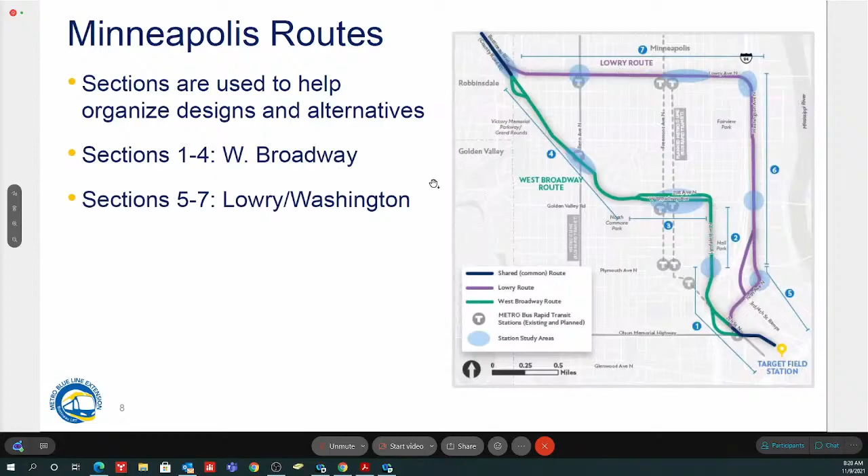Now, sections 5 through 7 are the Lowry Washington routes. Section 5 takes us again from Target Field Station roughly up to that Plymouth Avenue area on Washington. Section 6 is Washington, primarily Washington Avenue from Plymouth up to Lowry. And section 7 is a very long section, from basically Washington Avenue over to the West Broadway Lowry intersection. That's how we've organized it, so you can go in and find this information a little bit better. Next slide, please.

Some of the highlights we'll have in these sections: we've simplified the links here. If everybody remembers, I think it was even in March, we rolled out the links out of the downtown area, shown in the yellow box here. We had kind of the rainbow spaghetti, as we referred to it, with a lot of different options. As we've worked with the project partners, we've dove into these links and how they would fit and connect, and we've narrowed those down. We've taken out some of the link options that were challenging or beyond challenging, probably not feasible, either how we were getting off at Target Field Station, or as we were trying to find a route that navigated through the community. We were finding areas that were very high impact, or the alignments just would not fit very well.

We also have route options along 21st Avenue for West Broadway. That's kind of what I'll call operational opportunities that we can look at and review as we're going through that section 3 area. And then up at West Broadway, or up at the North Memorial area, we'll have some options there for how we get the light rail either off of West Broadway or from Lowry onto County Road 81.

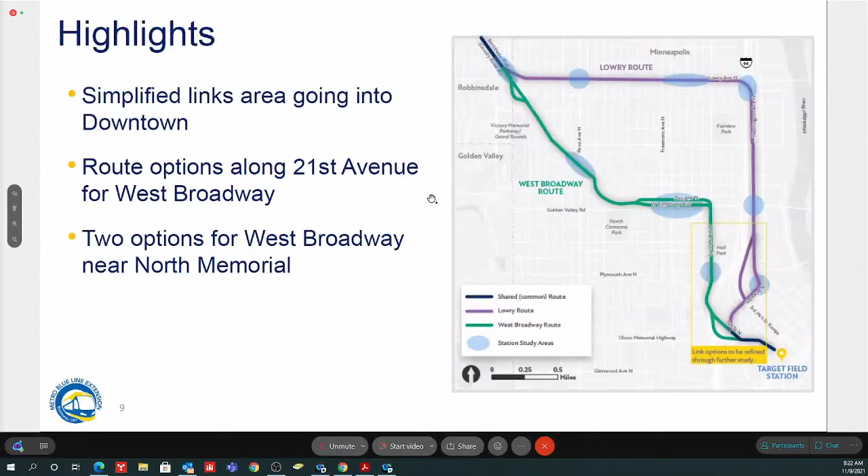Diving even farther down into this map here, this is really going to be key to find those alternatives in each one of these sections. So what we're seeing here is each section has multiple alternatives. We wanted to give some options so folks could see what the challenges were and the opportunities. There's going to be alternatives in there that are very impactful. They seem like they were probably the most intuitive at first as you roll them out, but we see that there was a lot of impacts involved with those. So then we've looked at some alternate options in each one of these areas that try to mitigate and try to limit the impacts that one option may have to the community.

Again, each one of these alternatives are going to show different challenges and opportunities. And the thing with these alternatives, they're just to help inform folks to digest and form an opinion on which route would be the best option. Good morning.

I was wondering if there's a question out there. Just a little background noise.

So each one of these alternatives, we don't need to decide on these now. They're just more informative of how things will work within that route, and they can be carried forward after a route has been selected and into the design phase. So we don't need to spend a lot of time worrying about which alternative needs to move forward. It's more a basis to help inform how a route would work and what the alternatives would be in that route. So in the yellow boxes there are the different alternatives that you'll see.

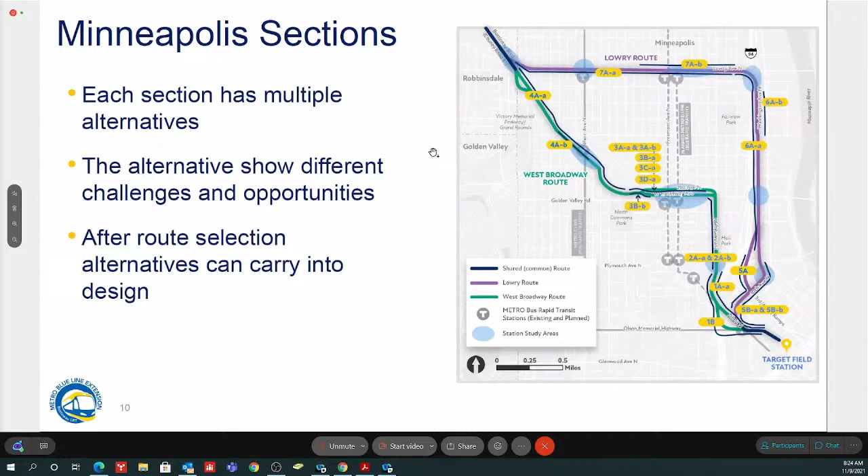Next slide, please. I'll stop and take a break there if there's any questions on how we're laying it out. So kind of a lot of work, but just how we're rolling out.

When we go to the in-person workshops, we'll have 7 different stations for each of these sections that will lay out side by side what all these alternatives are. So it'll be easy to see, okay, I'm in section 7, what are section 7A, section 7B, what are the differences, what are the alternatives, how does it work. So to inform the public, the community, our partners on how things fit in.

Quick question. The alternatives, is there going to be a time set for when these routes will be chosen, so there's no confusion about whether the alternative is going to be used or not? That's the first question. And the second question is, could you talk a little about 63rd Avenue?

63rd, the station up there, is that the question also? Okay, yeah, I can talk about that a little bit. We are focusing on the Minneapolis section here in the rollout, but yeah, I could take a question on that.

So alternatives, let's take that one first. As we move forward with a recommendation for route selection in that March timeframe, that goes through the advisory committees and our process there. We can pull those forward into design. So when we get into design work, our initial environmental work, post-March timeframe, will be when we really take a stab at what those impacts are, what the mitigations are, and what our design challenges are. That's when we'll start narrowing down which alternatives to move forward with. We'll continue to use this format with our advisory committees and our community outreach to help bring that process along.

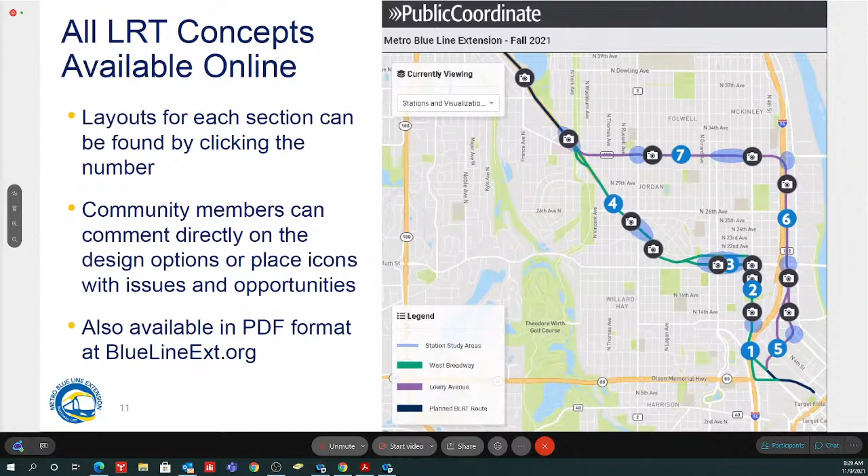Excuse me, I had to sneeze.

So, last one. Again, the whole purpose here is we're trying to seek community feedback. This information is being shown to help folks decide whether a West Broadway or a Lowry route should advance. So this is that open process to get that input. We're showing multiple options in each section on both routes, so folks can get the idea of what the opportunities are and how we can adjust things, avoid things, and move things around with alternatives.

All of this will be detailed and refined as we get into design and start doing our environmental and engineering work, and we'll be working on this over the next few years after a route is selected. Another thing to note as we look into these concepts is that they are just concepts, they help picture how things will fit in. They're based on a very minimal amount of design. They don't show a lot of things like greening, or a lot of the ped bike connections that will be very important.

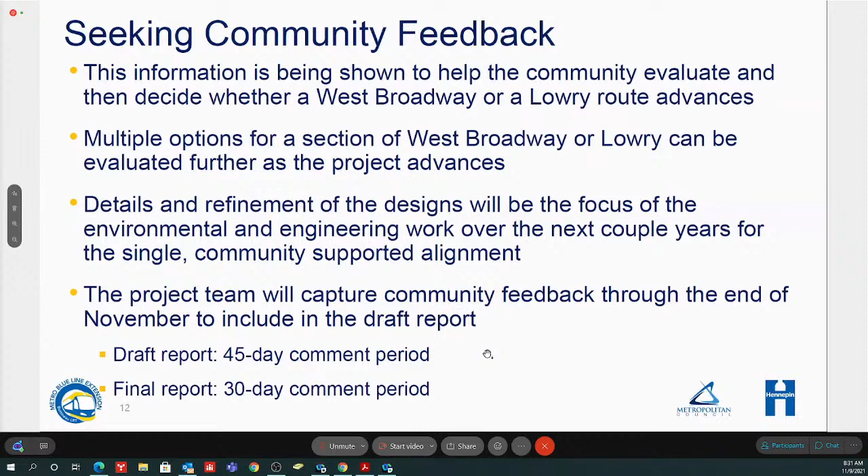And then after that, we get the comments back. We're able to digest them, discuss them. Then we will pull together that final report, and that final report will be in the March timeframe is what we envision. And that will also have a 30-day comment period for folks to look at the report and weigh in on it.

So let's roll up our sleeves here a little bit. Again, in respect for time, we're just going to look at a couple of the options, a couple of the segments, and walk through the plans and what you're going to see on them, and kind of how to navigate those a little bit.

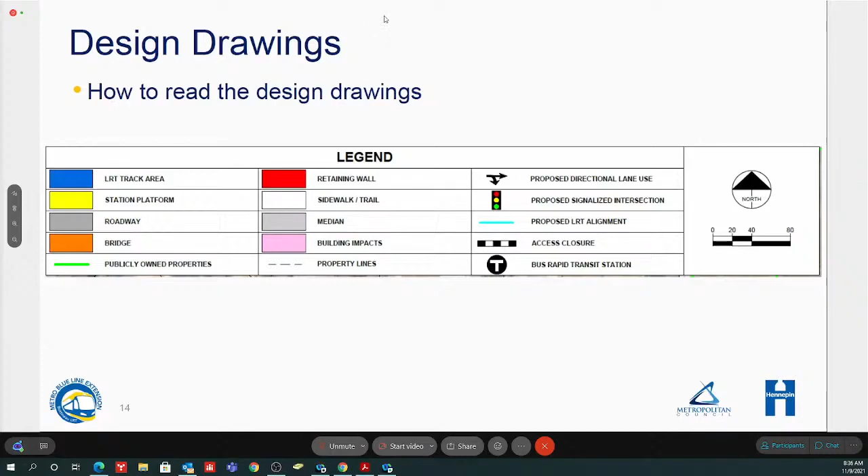Okay, so let's jump to the next slide, please. So I want to just kind of highlight section 7 here and take a look at that. What we're going to look at is that dashed blue box along section 7, where we have a couple alternatives, 7A-a and 7A-b. We're trying to really be organized here and make it clear, but even some of that nomenclature may get a little confusing.

But what we want to do is take a look at what the design challenges are along this alignment, like Lowry Avenue, some of the things to look at. There's a lot of unsignalized intersections. So if we're crossing the track, if the track is going down the roadway and there is a crossing, it needs to be signalized. So those signalized intersections add impacts.

We need to have - we discussed before that if there's a signalized track crossing and we have a signal there, we need left turn lanes. Those left turn lanes start growing the footprint. And some of the other things to look at is this mostly residential land along there, and then residential impacts along Lowry - not all, but there is quite a bit more residential along here, specifically single family residential.

So there's potential for more building impacts as we look at these that aren't shown if we add pedestrian crossings. So we know that in these plans we're showing where the signalized traffic crossings are. We've highlighted that, but we know as we go into design, we need to provide adequate pedestrian crossings so it's convenient - folks don't have to walk 6 blocks to get to a crossing, maybe just a couple blocks to get across those tracks in a safe manner.

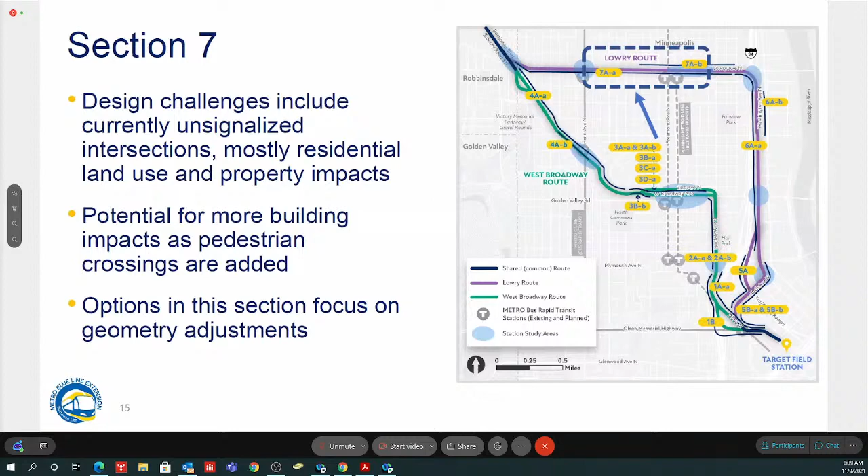And when we do that, we try to make it so we have boxes that have people transition as they're crossing into the tracks, so they're facing directions of trains. Well, that starts adding space also, so there's a potential when pedestrian crossings are there that could be additional impacts. The options in this section are more focused on geometrics - meaning how we move things around within that roadway, and how we mitigate for impacts that way.

So this map is a very good example of why all the information we have out there can get overwhelming. At the in-person meeting, this map will be at a larger scale so you can read it very clearly - probably at least 8 feet long on a table, so people can go through it. As you pull up the PDF and have to zoom in to look at the details and how each intersection works and where things fit, there is quite a bit to go along the segment. So we broke this down into a couple sections so we can zoom in and look at more detail.

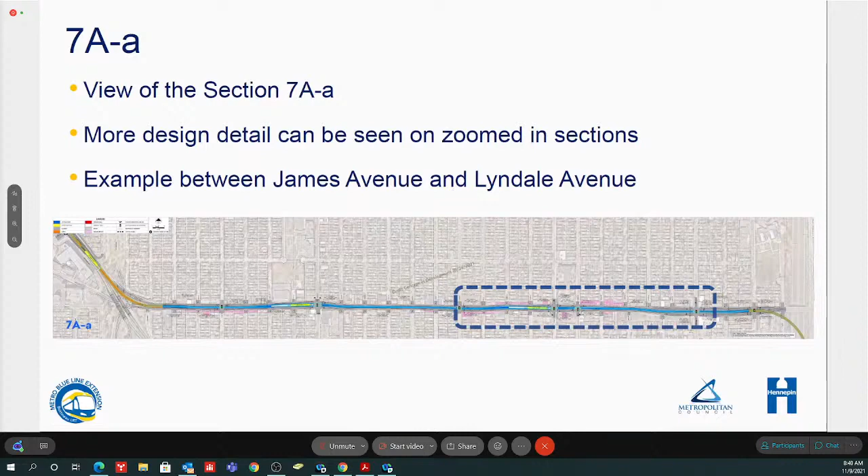And really what we're going to look at here is a couple examples or alternatives between James and Lyndale Avenue, so folks can see how it fits in there. So what we're looking at in this map is a section of 7AA, and what we're highlighting here is one of the things we look at, which is station placement along the alignment. And really with the D Line BRT coming through, Emerson Fremont is really an obvious place to get those transit connections through this area.

So we looked at how to fit a station within the context of this area. As you fit the stations in, the tracks have to widen out to go around the station, so there are impacts from how that lays out, with the left turn lanes in, there's a lot of different things going on. You can see in pink that there's a lot of properties impacted here with this design. Those pink properties are building impacts, and we're not showing if it's 1 foot or 15 feet into the building.

Some other things you'll see on this map: the blue is the light rail going down the roadway, at grade. The yellow is the station location on the left side of Fremont, and how that would fit in there and how you'd access that station platform. The green boxes outlined around properties indicate publicly owned properties, whether city, county, or other public agency or entity. We've highlighted that to put it in context.

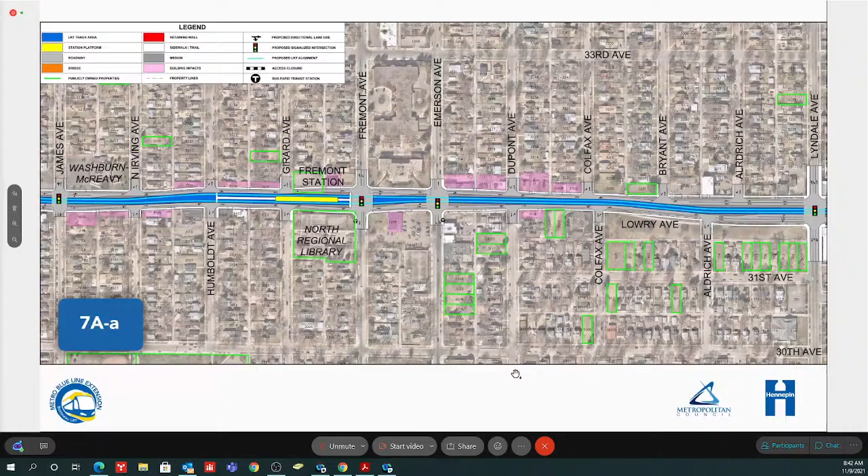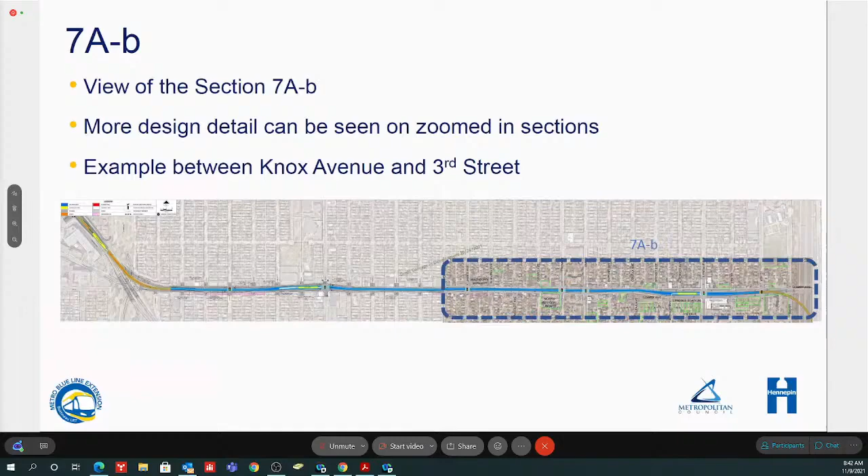So what we can see here is a comparison to a view of section 7AB, a different alternative, between Knox Avenue and 3rd Street. A little bit wider span, but it shows a different station location. We're widening it out here so we can see the station had some impacts as we put it at Fremont and Emerson. If we slide the station down, maybe closer to Lyndale Avenue, what opportunities are there?

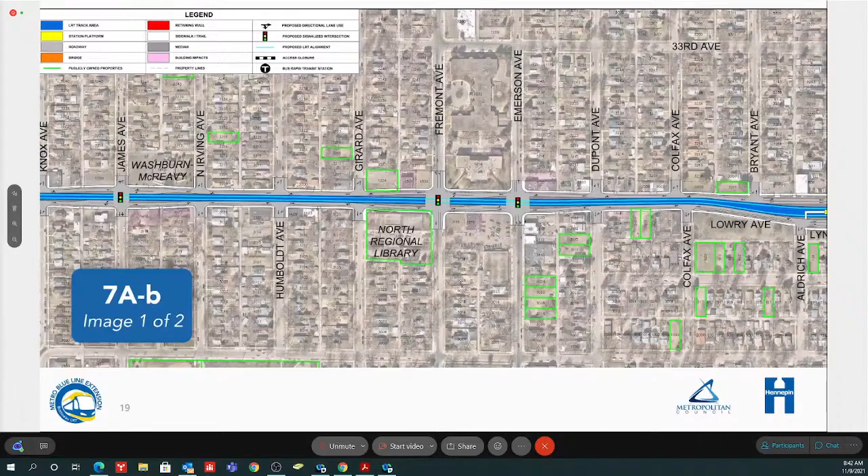Can we go back to that last slide please? So here you can see that by not having a station placed at Emerson Fremont, it really does limit the impacts to the properties around it. You can see a lot of the pink that was shown there - those building impacts are not in this alternative alignment.

And let's go to the next image please. This shows the station now located at Lyndale. One of the key things here is there's a lot of public right-of-way at Lyndale Station, it's a lot wider there, and there's some open green space in this area. So by putting a station in this location, maybe we don't have that direct Emerson connection - it's a little bit farther over to the Emerson Fremont D-line stations - but the station would fit in there with less impacts to properties.

Some other things you can see on this map: on the right-hand side of the screen is a bridge that would come from Washington Avenue over and connect into Lowry. That would be a bridge structure shown in that orangish color. So we just went through quite a bit of information really quickly. You can see how these alternatives lay out to give folks an idea of how moving things around can change the potential impacts along the alignment. Any questions here?

Just gonna have to wait till I get there to look at this, because it's small on my phone. I could imagine that.

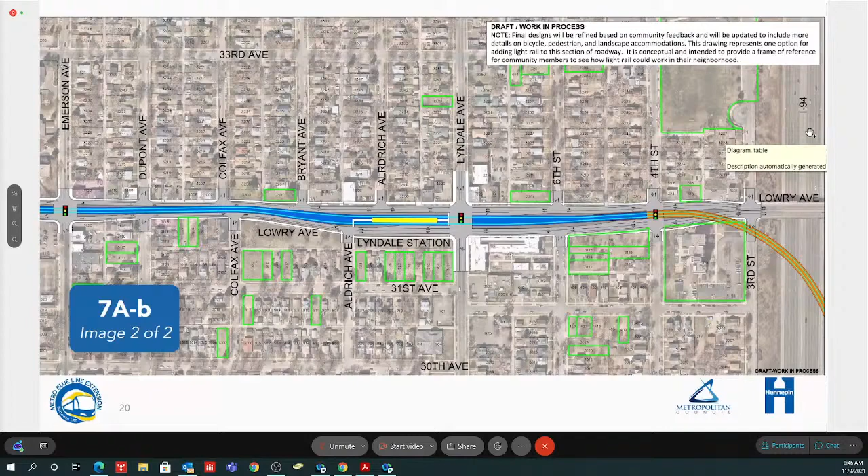So with that, let's move into section 3. This is again that section 3 along West Broadway alignment, and the area we're focusing on is from Lyndale Avenue to Irving. This one really has a lot of different options, and there's a reason for that because of the tight space we're in. We have many different concepts out there. I think some of the most straightforward concepts where we keep everything on West Broadway do have more impacts to properties, specifically buildings, and that's why we have quite a few more options.

Whereas on Lowry, there's in a lot of places maybe a little bit more setback from the right of way, here some of these buildings' faces are right on the right of way line, right on the property lines. So our alternatives here focus not only on the roadway geometry, how we can move around within that road and right of way, but also on some operational adjustments to think a little bit more outside the box of how we can either pair roadways or separate light rail from a roadway, or some other options.

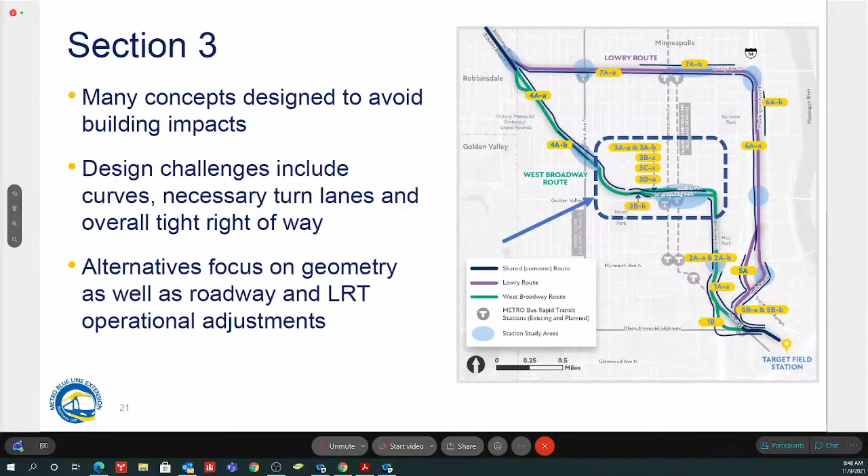We're only going to look at a couple of these alternatives here, just in respect for the time that we have. Next slide, please.

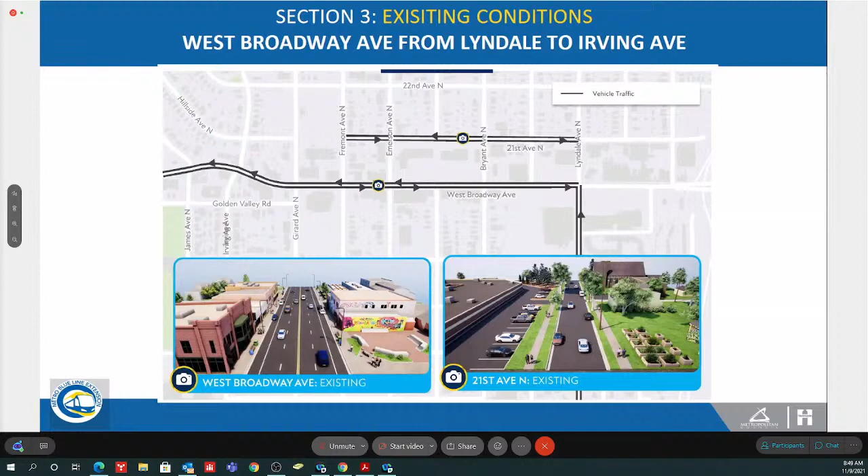With this area, we've included a couple of schematic or line drawings here to help folks understand a little bit better how things can operate. I think folks have maybe seen some of these boards out there, but this is an existing condition. We'll talk a little more about why we're showing 21st Avenue as we go into the design slides. West Broadway on these line drawings shows it's from Lyndale to Irving, with 2 lanes of 2 directions of traffic on those roadways, and the same for 21st up there - it operates bidirectional in each way. There's some existing graphics on the bottom that help folks visualize what it looks like today. I think folks have seen specifically the West Broadway existing example here before in previous presentations.

Next slide, please. So this is looking at section 3AB, from Lyndale to Irving, and this is looking at what it would be if we keep traffic - at least a lane of traffic in each direction - on West Broadway, and put light rail along West Broadway too. So we come from Lyndale Avenue and go to West Broadway, keeping traffic and light rail within the West Broadway footprint. There's a graphic we've seen before in presentations with the center-running light rail, that lane of traffic on either side with sidewalks on the outside, and how that fits in there. In the middle of the blocks, in many cases, it fits very well. It's really as we get to the intersections that it proves to be challenging, along with station locations.

Next slide. This shows, with that alignment, the more detailed plan drawings of how things could fit within there. We show the station right around that DuPont area between Emerson and Bryant. With the geometry, with turn lanes and such, the pink again shows what the potential impacts could be with this alternative. So you can see there are quite a few pink buildings along that alignment, and that has to do with both the track geometry through here and left turn lanes as we go through those signalized intersections.

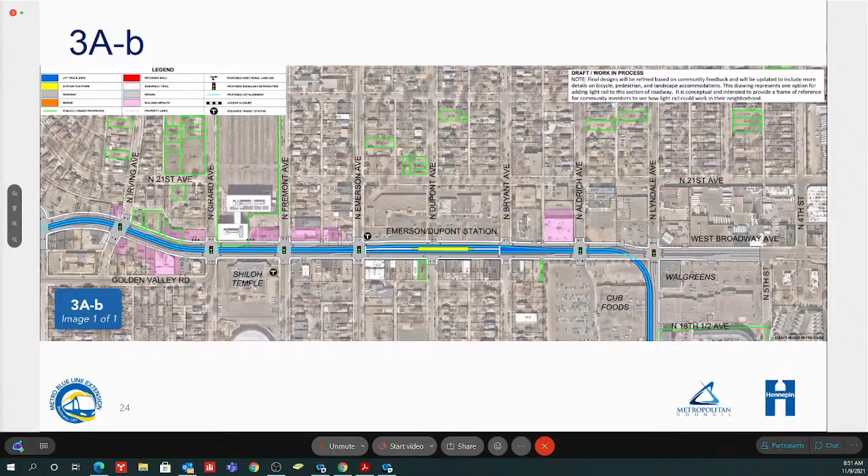All right, let's take a look at another alternative here. So from the pink that was showing there, that's where we want to keep with our project principles and try to minimize the impacts to properties, businesses, and residents. So what are some of the alternatives that we could do to limit and avoid that as best as possible?

I think what we came forward with is an option that starts bringing in 21st Avenue, and there are quite a few alternatives on the website with different operational configurations. This is where I was talking about not just geometric but operational, how the roadway could operate and how light rail could operate also. So this option...

Can we go back to that last one, please? This option shows maintaining a lane of traffic in each direction on West Broadway, and bringing light rail up to 21st Avenue. That light rail would come up from Lyndale, connect to 21st Avenue, run in both directions there. There would be a station likely in some place, then go behind the Minneapolis Public School building, and tie back in at Irving.

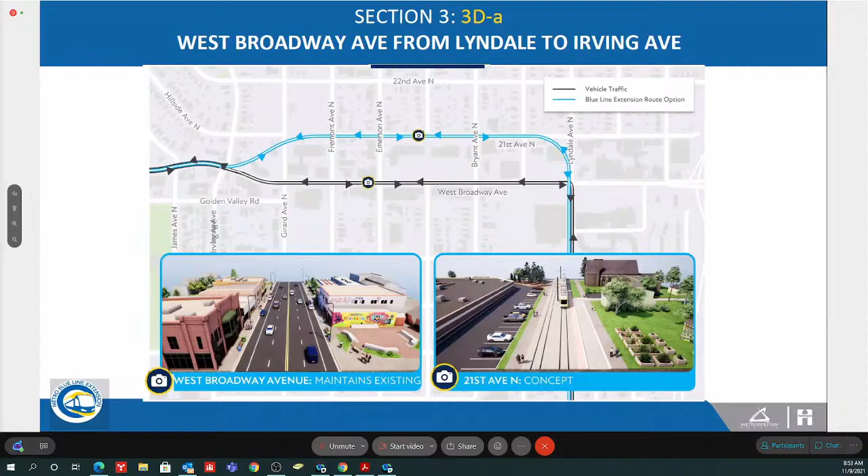So now let's pop into the map. This map shows what that stick configuration has. Traffic remains on West Broadway in this alternative. Again, the pink shows what potential building impacts could be with this alignment. The blue is the light rail going up to 21st from Lyndale.

A station is located roughly centered on DuPont between Emerson and Bryant, and how that station would lay out. The 21st in this condition would not be the through lane road it was before, but there are connections between the streets so it doesn't cut off alleyways or road connections. They can operate to 21st there.

There are some additional signalized intersections shown on 21st to accommodate for light rail and light rail crossings that we have here. And then this shows the alignment again in a bit more detail of how that would fit behind the Minneapolis Public School building, and then make that connection back to West Broadway in this area.

Any questions or comments on this alternative and how we got there?

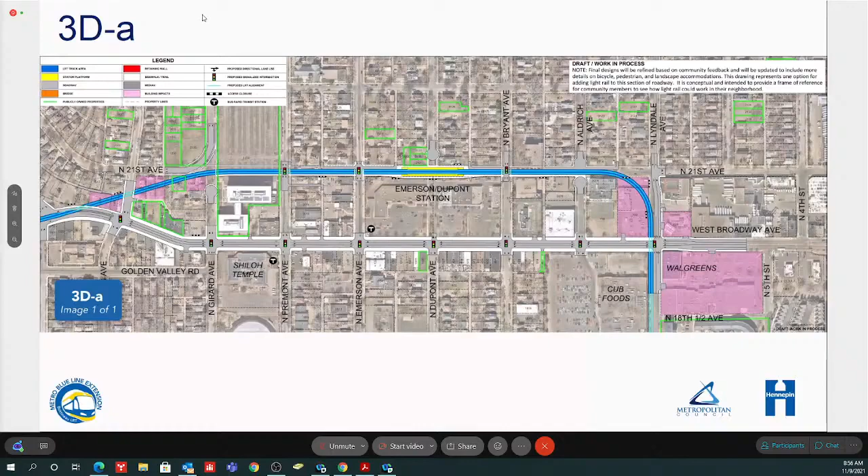So where I was going with this is these are alternatives as we get into design. Really our goal is to try to mitigate or minimize any impacts shown in pink. Obviously if we're going right through the middle of the building you can't really avoid it, that's tough. But some of these building impacts may only be a foot or two, and can we do some geometric adjustments to avoid those? Those are things we haven't rolled up our sleeves into in that much detail for any of these alternatives. It's more of, let's fit a section through here that we know meets the city's transportation policies, the county's policies for roadway and for light rail out there. So it's kind of the initial stab. But as we get further in design, we'll do what we can to minimize these impacts as a route is chosen, and as we start looking at the best alternatives within that route.

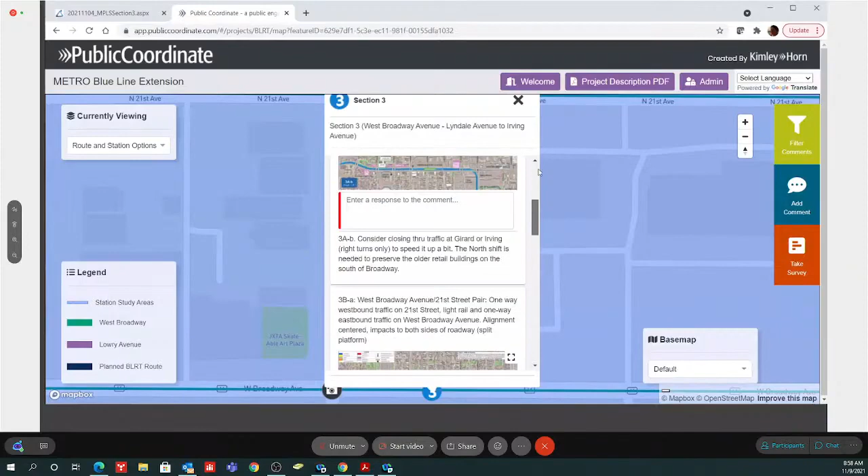We'll be able to zoom in a little bit to it. When you're on PublicCoordinate, if you click on the section number, it'll open up and you'll get this kind of list of all the options. And then you can expand it and zoom in.

So Nick, I can just click forward and we can go through the various options. Maybe the first one on the screen for folks is just if you literally put the train down the middle of the roadway, and that was kind of the starting point for how we developed the rest of the options. You can see this is kind of the baseline where we put everything down West Broadway through this area, and there's a lot of pink, a lot of impact shown.

That again is the basis of why we are moving forward with multiple alternatives through here, so we can minimize those impacts. So moving from this option is how we got to the 3AB that we just showed in the PowerPoint, basically trying with the geometry of the track to minimize the pink while keeping everything in the roadway itself.

And then, noticing that we were still hitting some community cultural assets, we started to explore basically the options that utilize 21st in various ways. These are ones that we didn't go through, so I'll turn it over to Nick to talk about them.

Yeah, this is 3B-a where we start splitting operationally the traffic that's on West Broadway. So light rail would go down West Broadway in both directions, but one direction of vehicle traffic would be going eastbound on West Broadway, while the other direction—this is kind of a one-way pair like Lake Street is in some locations—the westbound lanes would be moved over to 21st on this option. That's what's showing there. Again, at this detail, you can zoom in, pull up the PDFs and really look at how it works operationally, but it's splitting the traffic operations while keeping the light rail on West Broadway in this alternative.

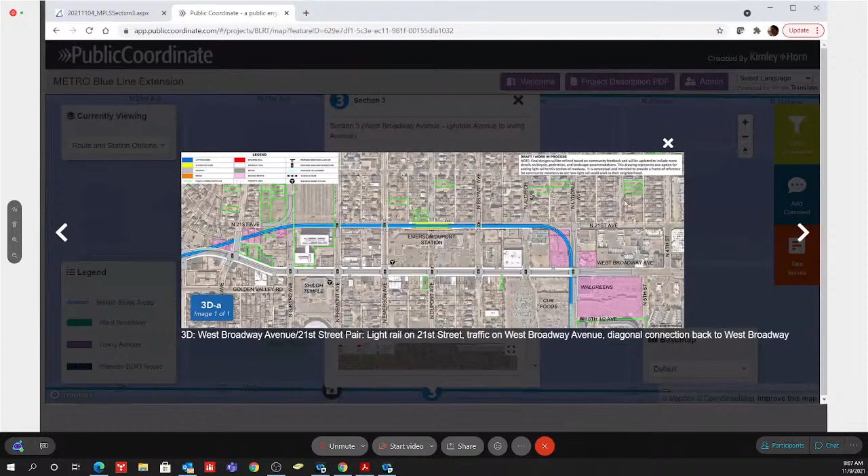Okay, I may bring back up the PowerPoint, but again, we can pull up any of the West Broadway or Lowry options that folks have questions about as we're going through this.

Any other comments, questions, general thoughts, feedback for staff from the committee? Again, we encourage anybody that can, if you're interested, to come to the open houses, the in-person ones. I think it will be really helpful to have more one-on-one discussions and be able to point at things and see everything laid out in detail together.

Okay chairs, let me know what you think. I think we could probably move on to the next agenda item if the committee feels ready, or want to prompt more for more discussion, or whatever you feel we should do at this time.

Yeah, we're going to have better communication when we can see these things in 8-foot or 10-foot layouts, which will benefit me for sure quite a bit. With that, anybody else have anything with Nick, Sophia? So otherwise, we can jump onto the evaluation criteria by Sam O'Connell.

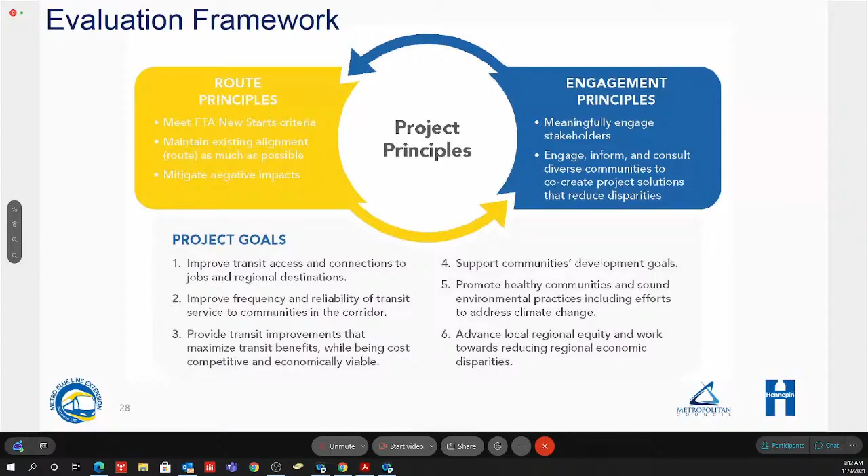So if we can move to the next slide, I'll show a little bit about what that evaluation timeline looks like. We will spend our next meeting in December bringing back that feedback from the workshops, that really intensive work, the community outreach, those one-on-one conversations that Sophia and her team and others are having, and help us filter through the evaluation pieces to bring forward for your consideration in December, a walkthrough of the evaluations that we think are going to help community members get to saying, yeah, I think when we measure the success and maybe the challenges of either a Lowry, Washington or West Broadway route, that this really captures those metrics that we're very interested in.

That will also be part of the draft report that we will release in December. And again, the draft report and all of its information, including the evaluation criteria, will be out for public comment. So it's another opportunity for community members, residents and businesses to say, yeah, we think this really hits it, or can you also consider this metric as something to think about in the evaluation. That will help inform the final report that comes out in Q1 of 2022.